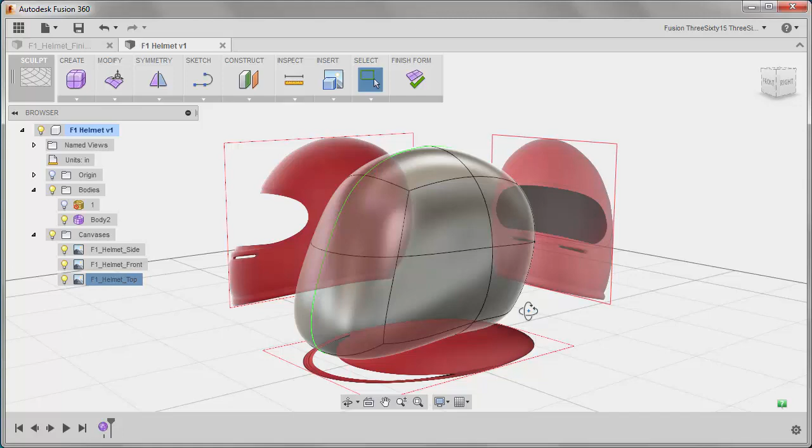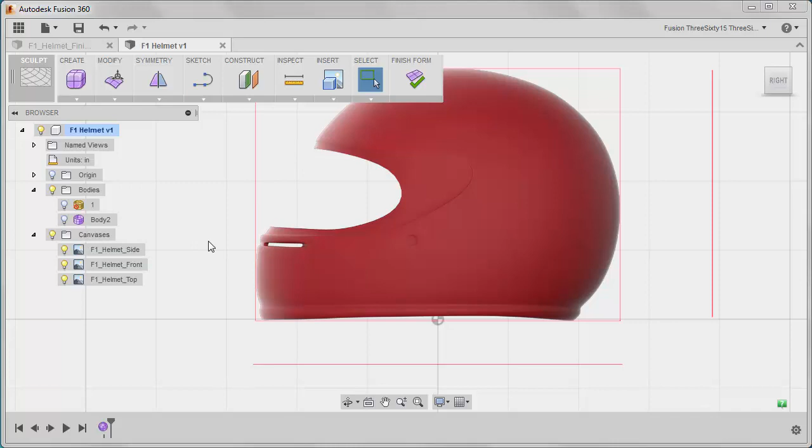Let's go to a right view. As you can see, with our current structure, it's going to be really hard for us to get this hard line down here. If we turn this body off for a sec, see this line? Without adding extra detail, it's going to be hard to get some of that. Now look at this really fine detail. I'll show you how we're going to capture this and get the visor cut out as part of this. Let's turn the body back on.

What we're going to do is double click this edge, and that will grab the entire edge loop. We're going to right mouse button and say insert. We're going to change this to minus. We're going to say OK.

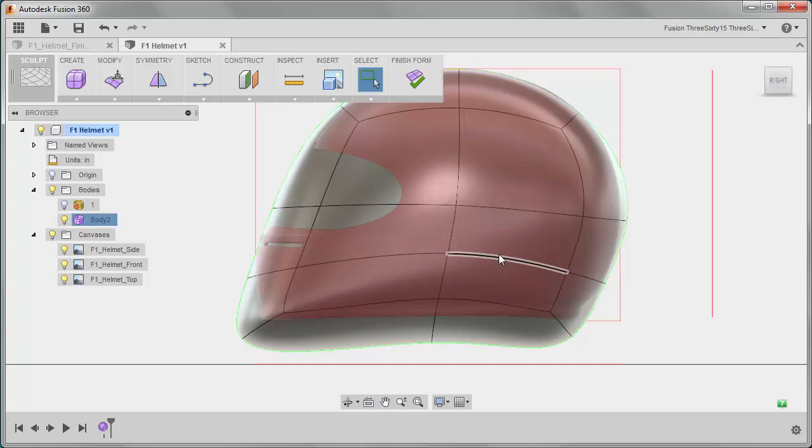Now our shape changed a bit, which is OK. What I'm going to do is double click, edit form. I'm going to grab this top and scale it down. That's straightening it out, scaling it in one direction, top to bottom.

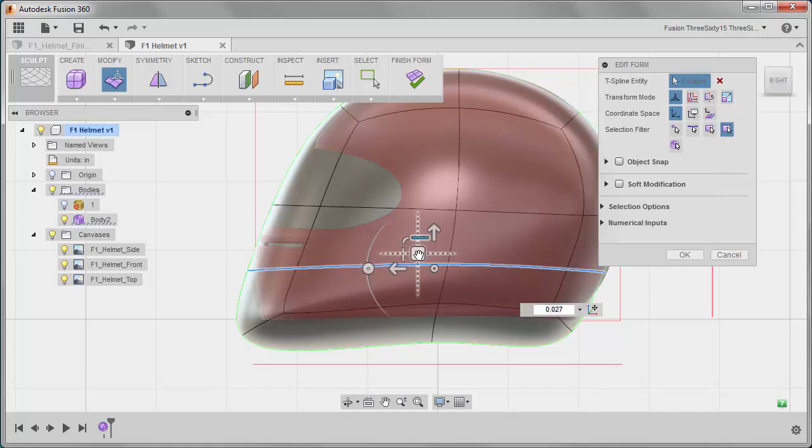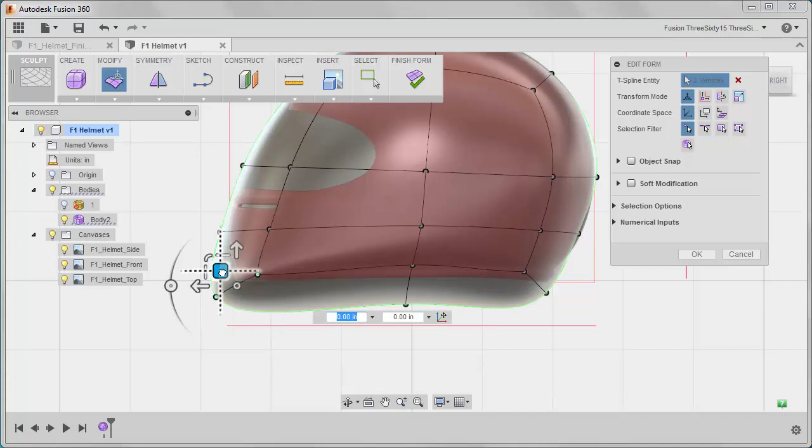Keeping these lines straight will help us. So we can grab this edge and start adjusting. You're going to add edges and then refine them. We're going to pull this back here, pull this like so, pull this down like so, let's pull this in. There we go, okay.

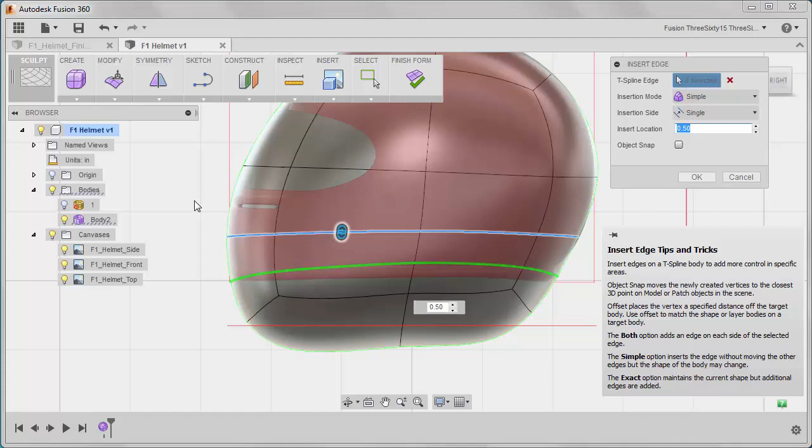I think we're going to need some more edges right here so that we can actually pull in this bottom piece. So let's say OK, grab that edge, insert. That looks good. We're going to say OK.

Double click that, edit the form, let's straighten that out. And now let's straighten that out as much as we can. Now let's translate this up a little bit.

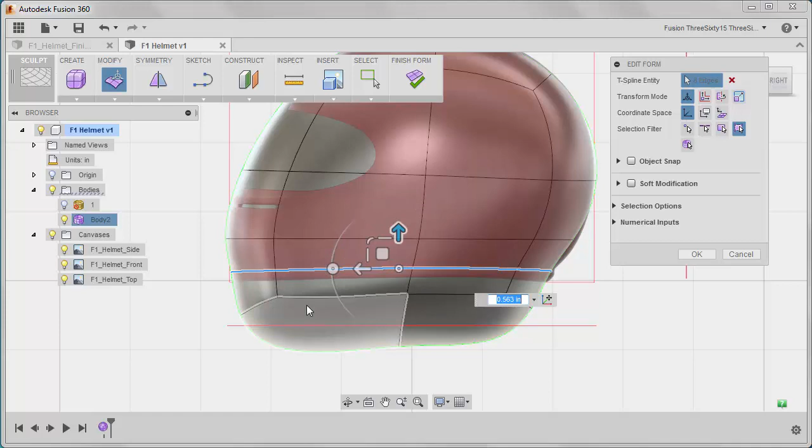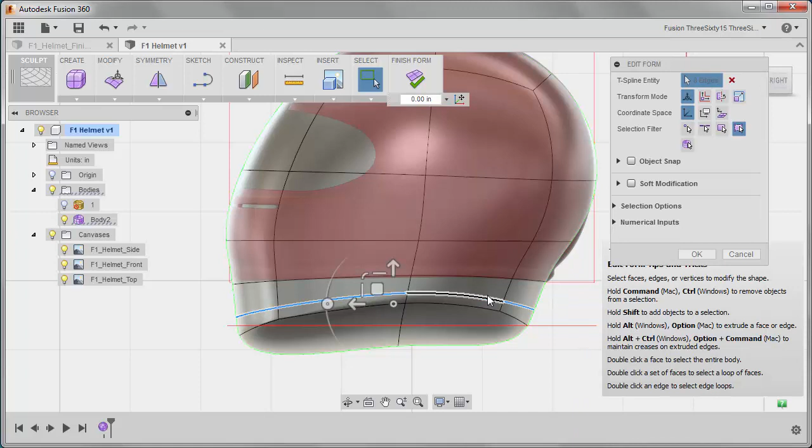Now we also want another edge down here because we're going to delete these faces down here. So let's insert another edge, minus, say OK. Again, rinse, wash, repeat, same thing. Edit the form. Let's straighten that out like that.

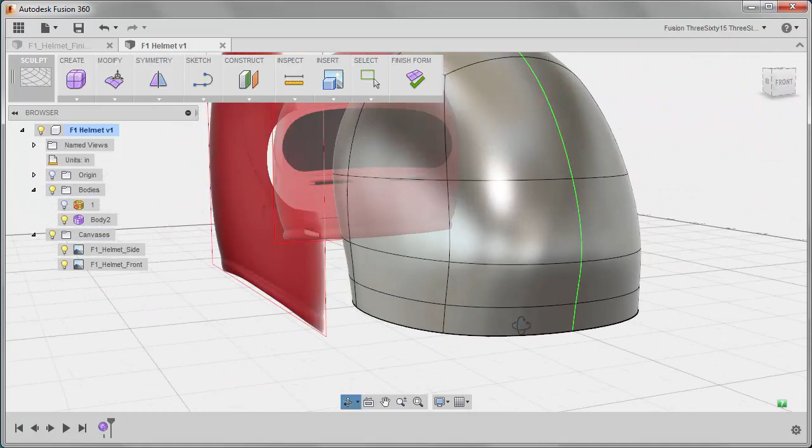Now I'm going to grab these faces right here, and we are going to delete those. You can see how our helmet's starting to come together.

Okay, let's start adjusting our shape.

You see how those tooltips keep popping up? Right here, under Preferences, you can say Show in-Command Tips and Tricks. If we turn that off, those will no longer keep popping on the screen. So if they're in your way, you can turn them off that way.

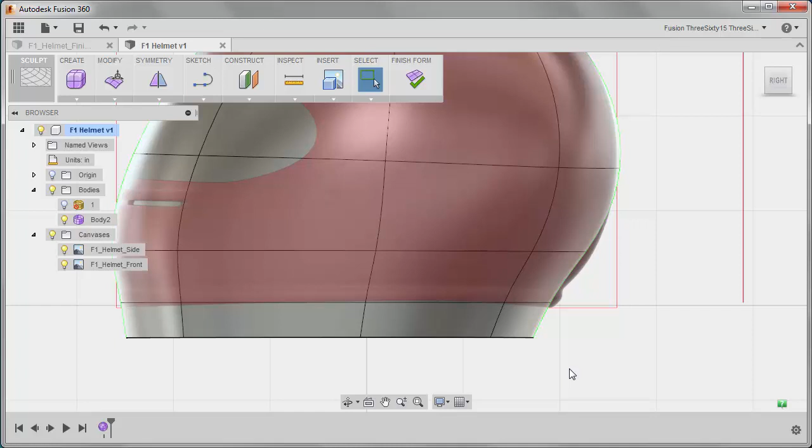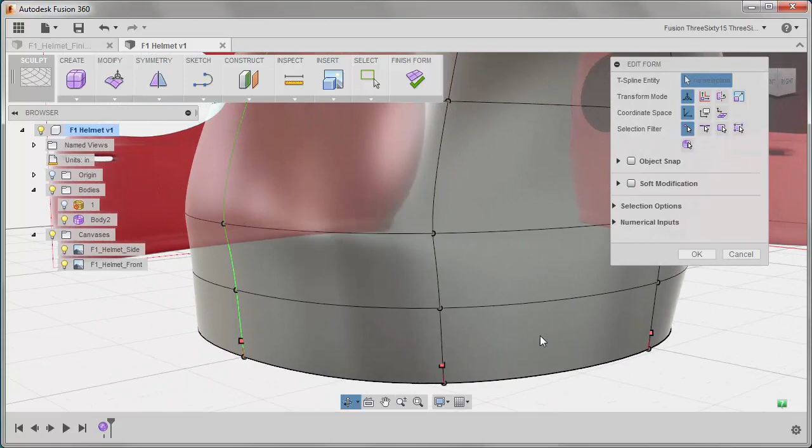Double click this edge, edit form. We're going to slide this up here. We're going to adjust these back here. Now you notice we have some new geometry type in here. These little handles are called tangent handles.

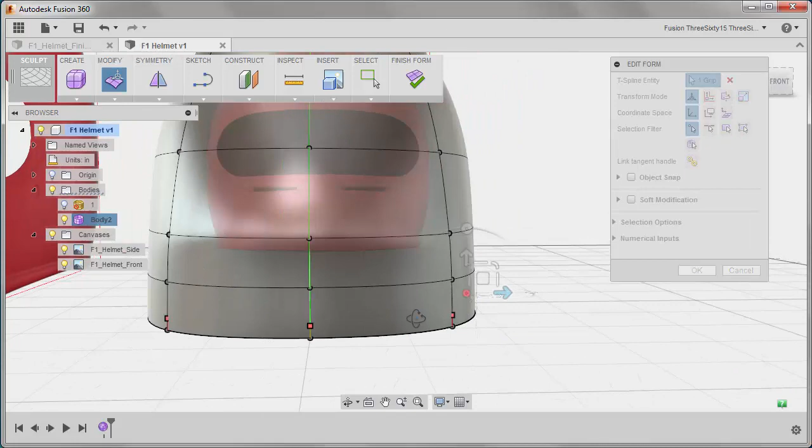So as I adjust this, watch what happens. It's adjusting that surface outwards, adjusting the transition from one to another. And just so you know, because I have symmetry turned on, it's adjusting it on both sides. You'll see as we get here, right up here, that those will become important.

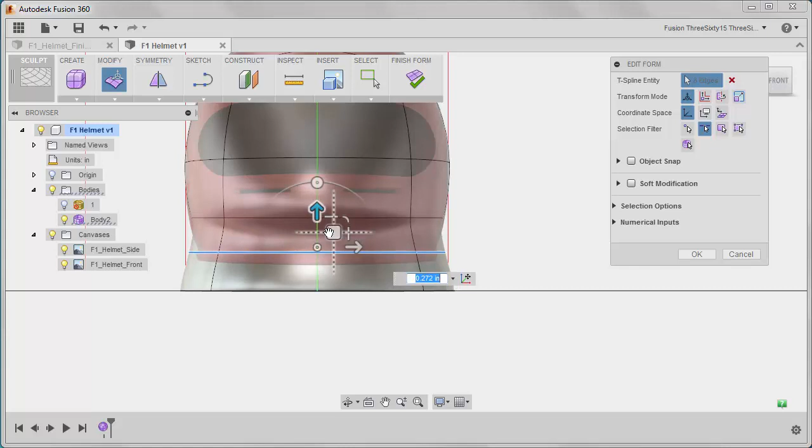So let's grab these edges here, pull that in. Let's grab this entire loop. I'm going to grab the center, pull that in, push it up. We're going to grab this bottom edge, pull it up. We're going to scale it in like so. We're going to take this one and scale it in like that.

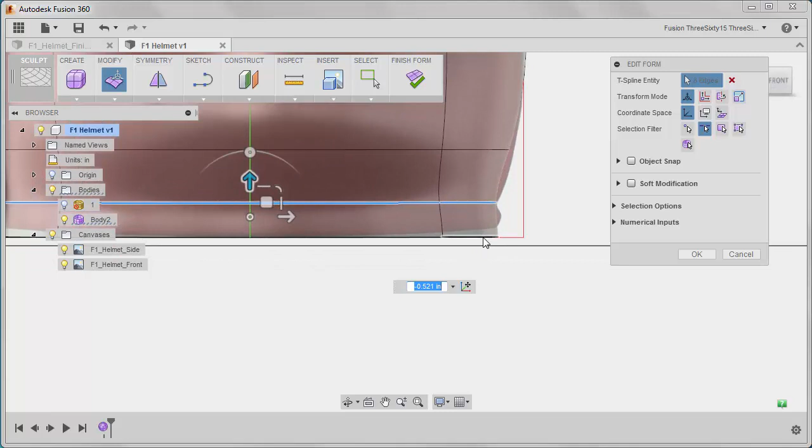Now as I bring these closer, zoom in here, you can see what's happening. As I bring this in here, let's go the other way. So right now we're not getting exactly the shape that we want here.

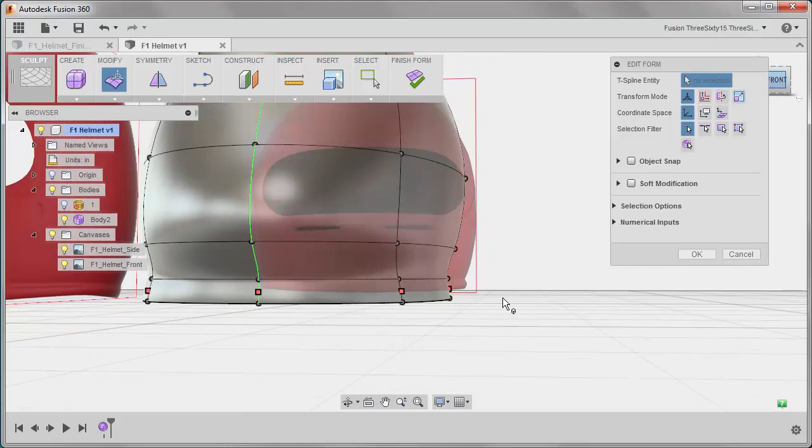So if we turn on points, go to the front view, let's grab all of these handles right here. Now watch. See what we should be getting here is the shape that we want. See how that goes out just a bit there? So now we're getting that little curve in it. That's essentially what we're trying to do.

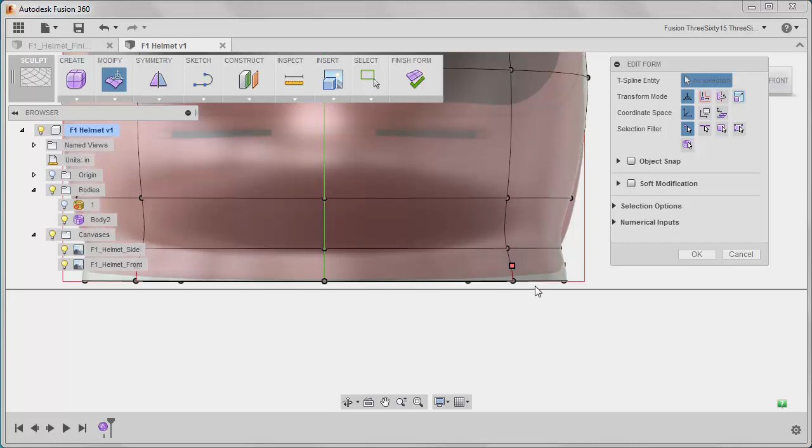So this is the fine tuning of everything. So if we go back to points, let's grab this stuff and just bump that up. Now we're going to take this and just move it out.

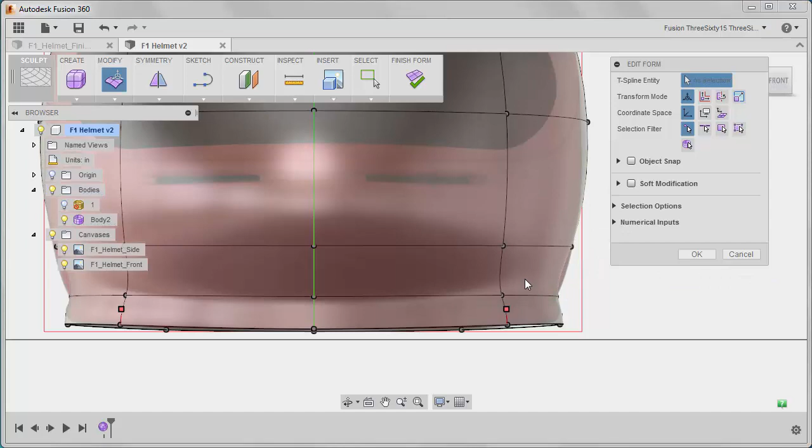All right, doing pretty good here. Let's double check all of our views here. Ah, this one's way off. So we're going to move that forward. Let's move that forward. So it's just a balancing it all out.

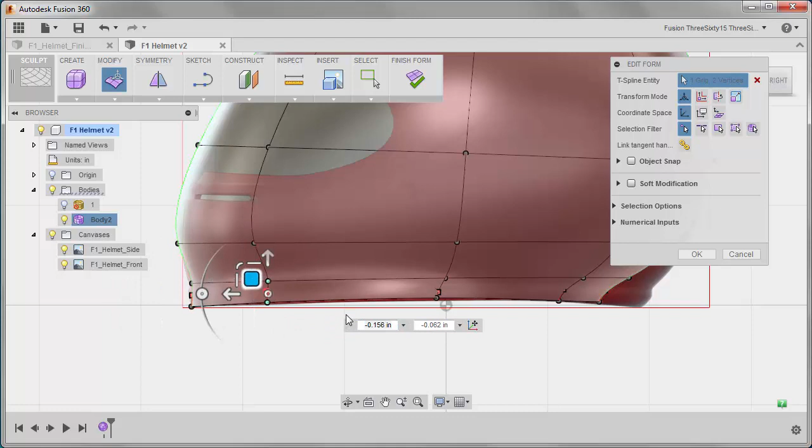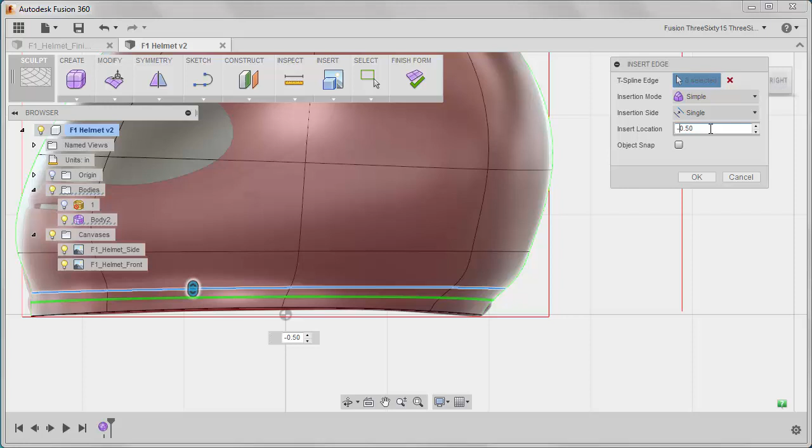There we go. Now we may want to get this just a tad tighter, and how you do that is we again insert another edge, and we're going to say minus. See how I got that nice tight area now? So now we can zoom up here and get that close.

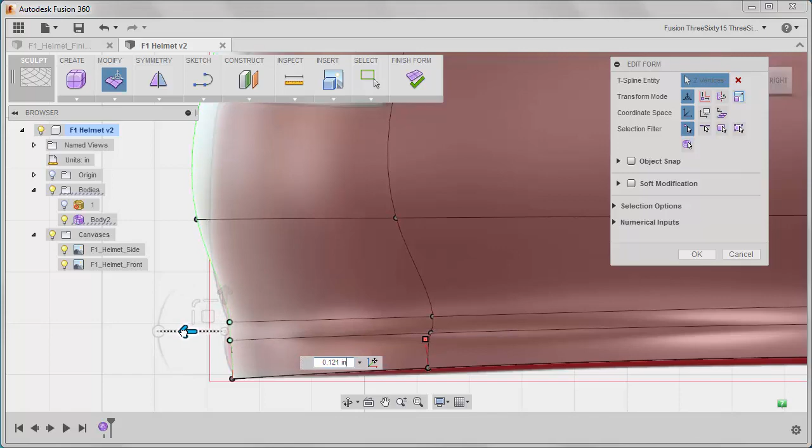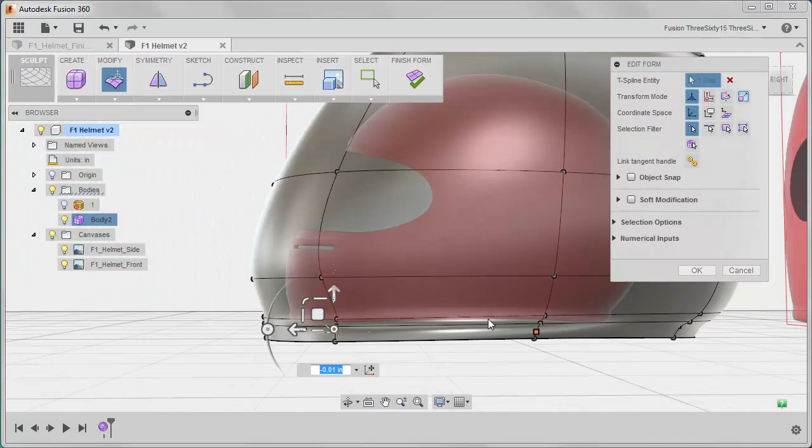So if we edit form, all we want to do is grab these two right here, like so. Now if you want, you can take some additional time and do stuff like this - pulling out on these handles and making that a little bit more rounded. Now you got to be careful because you don't want anything pinching, meaning either edges or points overlapping. That will cause problems as you move forward.

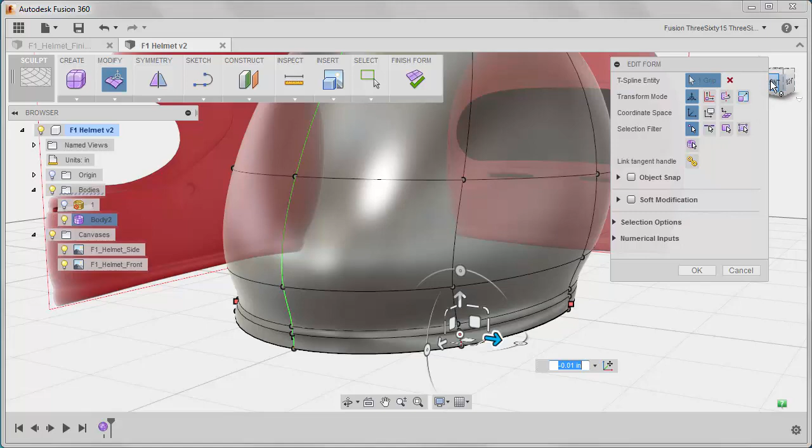So let's check our front view out. Pretty close. Let's go look at our top. Looks like we accidentally deleted our top view at some point.

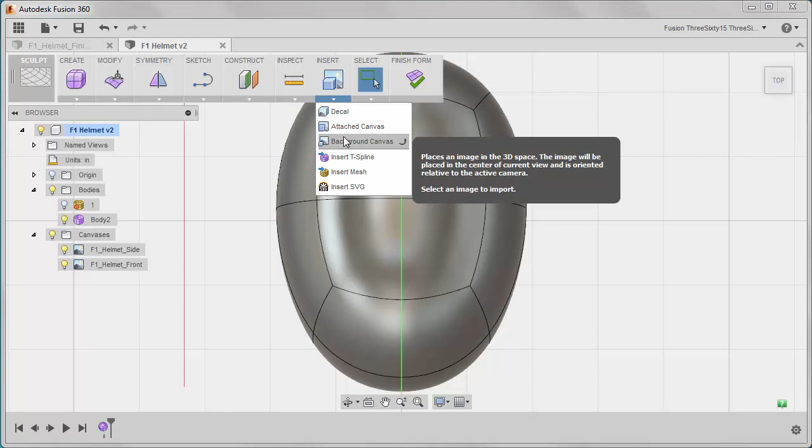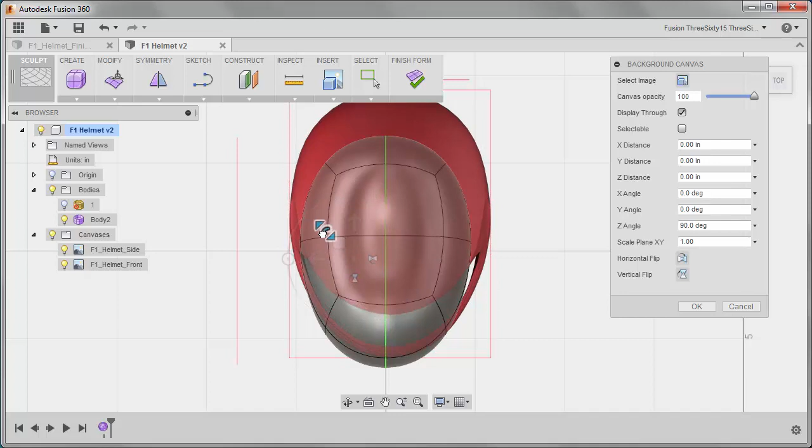So what we'll do is we will say background canvas, and I know exactly when I did it. Top, open. Let's make this like so. Display through. There we go. Let's scale that down. Scale it up a tad. Let's just get it a little bit more right there. That should be good.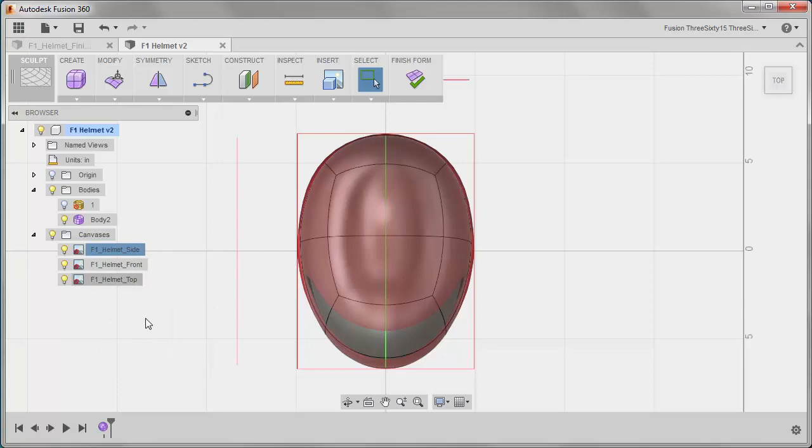And then make sure that selectable is unselectable. There we go, so you'll see the little red dot there. Now I can't select that. There we go.

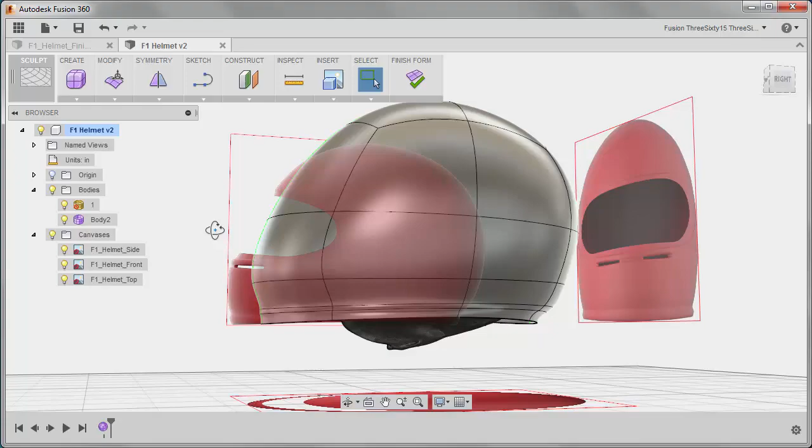Okay, so we're moving along on our helmet. What we're going to look at next is how do we add in these other details. So I think we got a good shape. Let's turn on this here. Okay, so we can see our guy in there.

So let's look in the next video at how to create this cutout right here. So let's go ahead and save, and we'll see you in the next video.